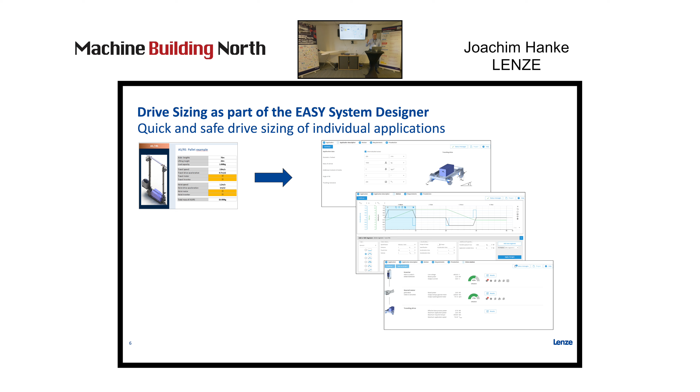And they ask us, hey, I need a drive, a very efficient drive. Then we take our tool and make the dimensioning of a very efficient drive, like an inverter, a servo inverter, a servo motor, something like that.

You can also see our tools, which are connected directly to the customer - we make the dimensioning, we have the topology behind it, and then automatically the documentation comes for your customer. We can use the EPLAN and CAD data automatically to make the drawings, and you can also handle it with CPQ, so you can offer or order this kind of component directly in SAP and Lenze. So you don't need different departments for that - this is only digital.

And there's another big point. If you do the dimensioning, you know what kind of motors you are using, then you have some parameters, because you know the profile, the motion profile you want to use. We can export that, and this becomes part of your PLC programming.

So this is one tool, this is part of how we're thinking about saving time and reducing complexity, and it's a cloud-based solution. That means if the customer is working on that, we can step in anytime, if we have access, and optimize it together with him - so it doesn't matter where he is.

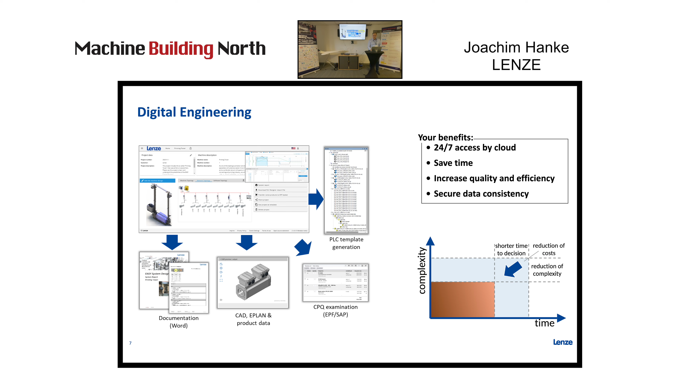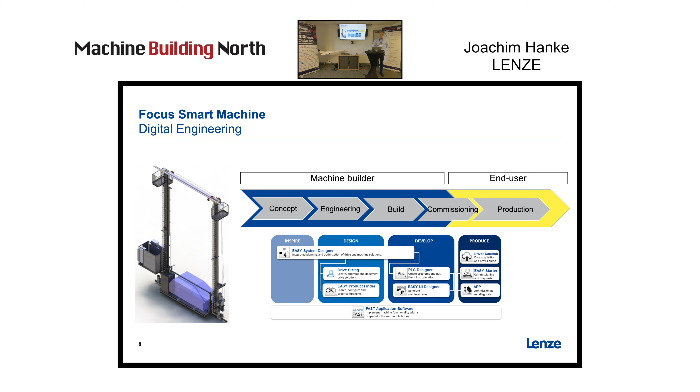So at the end, we have different areas, different people, different tools, but everything is connected - and that's a key point. I think this is a digital engineering process where you have no data losses. So this was the step into digital engineering, and now we want to look at an automatic warehouse.

What does it mean if we look at a warehouse? This kind of warehouse, where we store material and transport it - for example, 600, 700 drives are installed here in this kind of warehouse. Our customers like Stöcklin, Witron, TGW, Vanderlande, Dematic, all the big names, they build this automatic warehouse.

And they are responsible for smart production, right? So they make the material flow very efficient. They do the monitoring, the optimization, the plug and produce - this is the part of these key customers.

Lenze, what is Lenze doing? We are responsible for the smart machine - so this kind of stacker cranes, conveyors, AGVs, something like that. And if you're looking at digital service, digital engineering, digital solutions, then we go with our part here into asset management, remote maintenance, condition monitoring, and predictive maintenance. This is what we are doing.

And then providing to these guys here that they can make a smart production at the end with the application. Now we step into a machine.

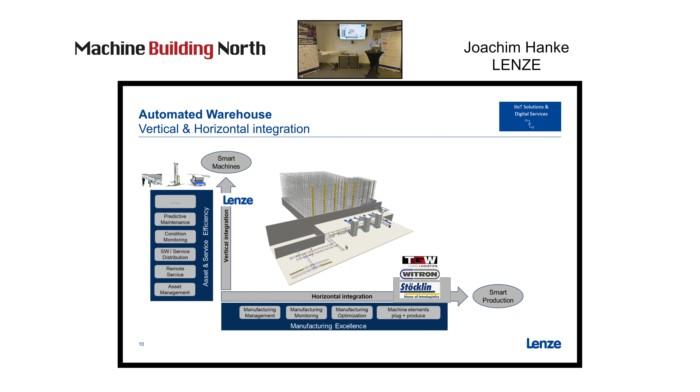So here you can see a real photo from a stacker crane and the conveyors. If you want to have a modern factory, a modern warehouse, then you need a modern infrastructure for that. So here you can see this kind of crane has these 5 axes: driving, hoisting, load handling device, fixing, something like that.

And then this data, if you want to make it digital, if you want to monitor something, you bring this data out via Ethernet-based communication to a data store area. You have some software there, and then you have the dashboarding, Grafana dashboarding, and then you can bring it to the shop floor, to the maintenance guys, and make it visible.

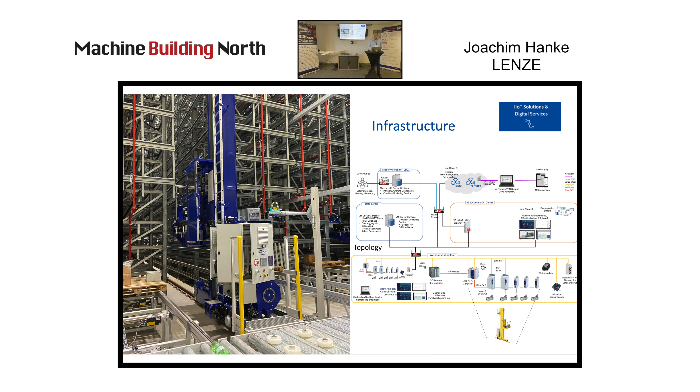For sure, it's not so easy. We've done that on our own in our new warehouse. How to deal with IoT, and also the security - this is also a learning curve. So what is essential to have an efficient and very visible monitoring?

You need a modern frequency inverter or servo inverter, doesn't matter. And you need this kind of process data - this is the key element to make predictive maintenance at the end. So this kind of motor frequency, motor current data must be captured with a high resolution oscilloscope function, otherwise you don't get good data.

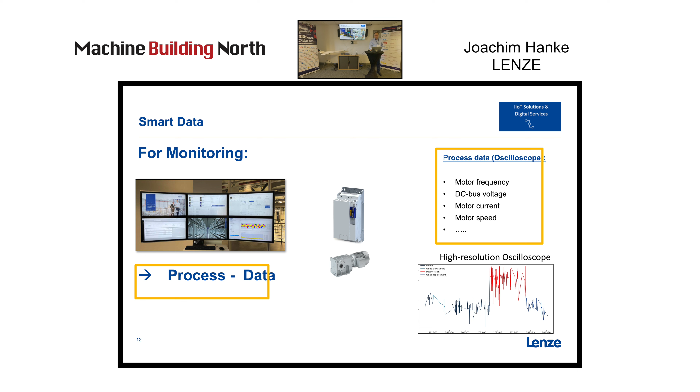So I will make one example. If we now look into this crane, and we look for these guiding wheels - this one. These guiding wheels have the task to move this crane very stable in this direction, not this one, not this one, very stable in this direction.

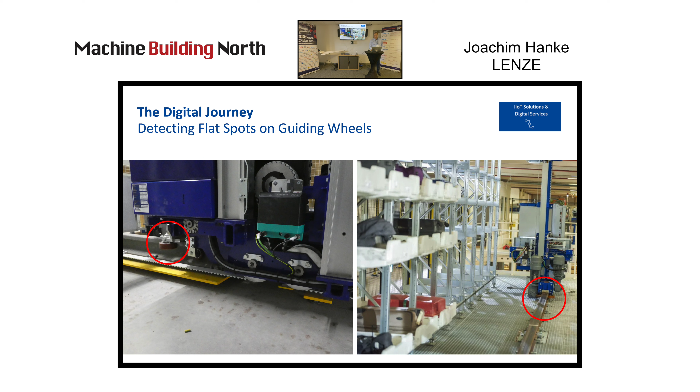And after a while, this kind of wheels have some problems. It's also normal after a year, after 2 years, something like that. And at the end you see some of these flat spots. What do the flat spots do? They bring vibrations and shocks, and this can also come from the construction not being very accurate, or the pressure of the construction being too high, something like that.

And you can see it - this is not connected directly to our motor, it's connected only in the mechanical part. But we can see the shocks and vibration in our motor current, if you know where to look.

And here was a typical service, and they found out, oh, this flat spot may need to be changed. And then we asked our maintenance, okay, can this be a problem in the future? Yes, this can be a problem. And then we analyzed, because we had the data, when does it start?

And we applied some filters and knowledge, and then we could see, if you know where to look, that this kind of problem occurs 40 days before. And this is kind of predictive maintenance. If you can see what's going on in your machine, you can plan a service - it's not waiting until the machine stops or has a failure.

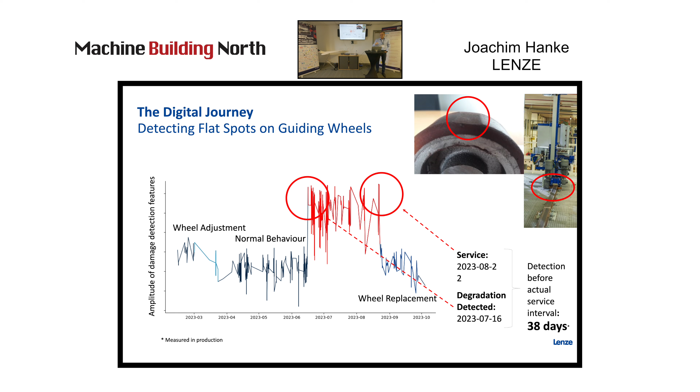So you can plan a maintenance topic, a service topic, and this is a key element. And you do it with standard components - you don't need an external sensor or something like that. We see it with our high accuracy oscilloscope functionality. We can see this kind of topics. So with a modern frequency inverter, you are able to do that.

Good. Comes to the last point. What I want to present is sustainability and flexibility. So one part is the topic of decentralization - how we can make a different solution with less components.

And I'll give you one example here. You see a truck load and reload application. This is an application very common at the door in the warehouse. A truck is coming, and this kind of telescoping conveyor goes inside the truck, and then the guy can put the boxes on the conveyor here, or reload or load the truck.

And for that standalone machine, you need this kind of control cabinet, so with a PLC and with the switches and clamps and connectors, frequency inverters and everything. So this part is here integrated in this kind of telescoping conveyor.

So what is the story for decentralization is you can do it in a different way. If you have a frequency inverter which is able to work without a control cabinet, and you have the PLC functionality inside because it's not so complex here, we can do it with some - three, for sure you need 3 frequency inverters for that.

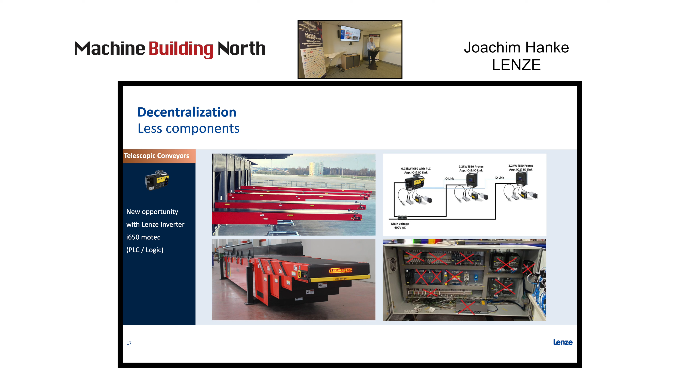The last point I want to mention here is DC supply. So today we are working on the AC level for sure, and the DC technology will come. Big customers in the automotive industry are asking us, hey, we want to use in the future only a DC factory, nothing AC. So what does it mean for us?

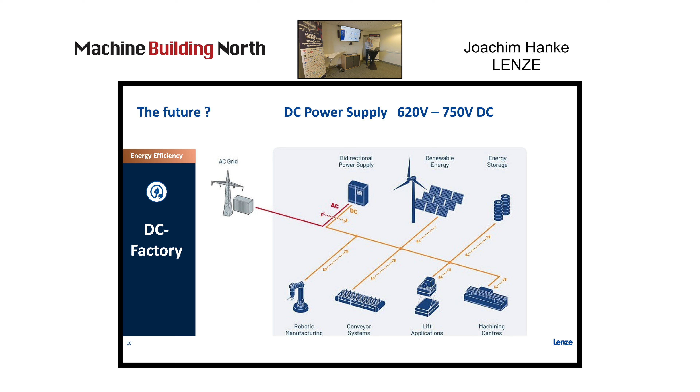You can see you have generative sources, you have the solar panels, you have the wind turbines, and you have energy storages. When you are able to do a factory completely in DC, for this machine center, conveyors, robot system, lift application, everything in DC, this is a huge benefit for reduction of cables, for reduction of the infeed power. And I will show you what this means with the example from the warehouse I showed before.

So if we now look into this warehouse, today it's done in 400 volt 50 Hertz for sure, other components are not available. So then we make a calculation: what does it mean if we go completely in DC technology, if the products are available?

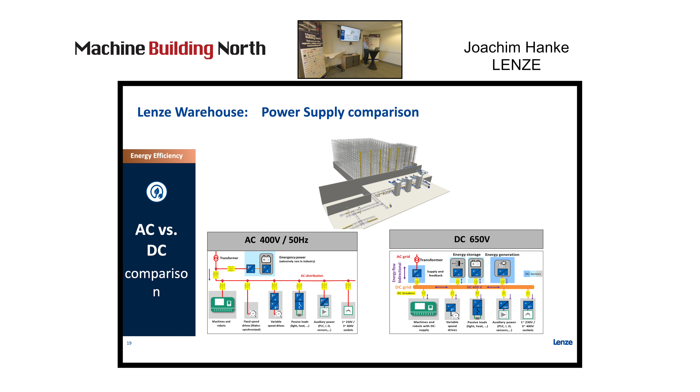Therefore we make a consumption and energy analysis, and we add up all the motors and installed base. You can see from this warehouse around about 650 to 700 drives, many small drives for the conveyors for sure, and many bigger drives for the cranes, for the strong cranes.

560 kilowatt installed base. And you see when you make an analysis over 1 week what energy this complete warehouse is using, you see the weekend here. Then there is only a peak of about 200 kilowatts, something like that, and this is the normal power you need as the complete infeed for this warehouse. On average, if you only see this one, you need only 6 kilowatts. For sure you need the peaks to make the acceleration and the speed and everything.

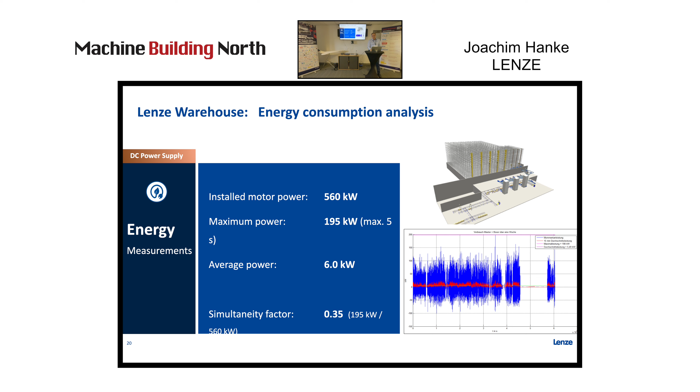But you have also enough generative power here which you don't use. So now comes the last point: if we are able to do that with a DC bus and energy storage, then you can reduce this kind of peaks from the infeed power station.

Reduce it dramatically, 60 to 80%. For sure you need these peak topics to have this acceleration, but this comes from the storage, from the energy storage topic. Therefore you need this here. Yeah, with the storage you have a 100% energy exchange, so you don't have this kind of brake resistors. You bring the energy directly back to another machine or into the energy storage. So this completely changes the topic of storage.

And then comes the next big point: less copper. So the cable you are using is dramatically smaller. And then comes the point for us: we can also provide in the future smaller drives because you don't need this kind of AC topic.

So are we ready for that? No. Are we doing that in the future? Yes, for sure. This kind of advantage is so big, and the end users like automotive are pushing us so hard, but they can only do it in a DC factory if it's not Lenze alone, as you need all other components there in the control cabinet.

Also other suppliers like Siemens and so on. So they don't want to deal only with Lenze for sure. Maybe it's better, but it doesn't matter. So this is, I think, a big topic.

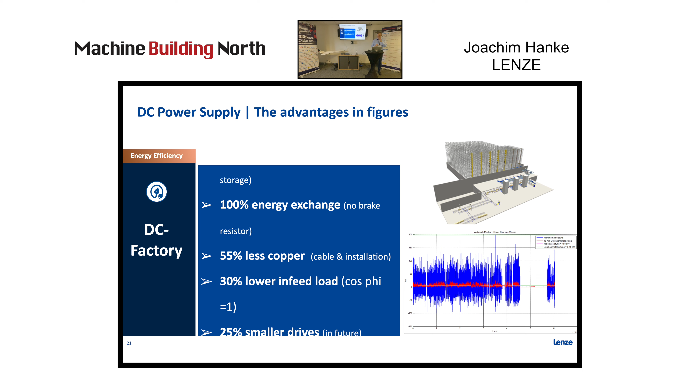It's interesting, so it's really an interesting story all about. We are only talking about some slides here, but you can imagine if we want to talk about all the 7 elements with a deeper dive into these topics. This is why we are doing these innovation days, innovation with key customers. They open their mind, and we open our view, and then we hopefully create a better future, a better future in efficiency, a better future for products, more output for your customers.